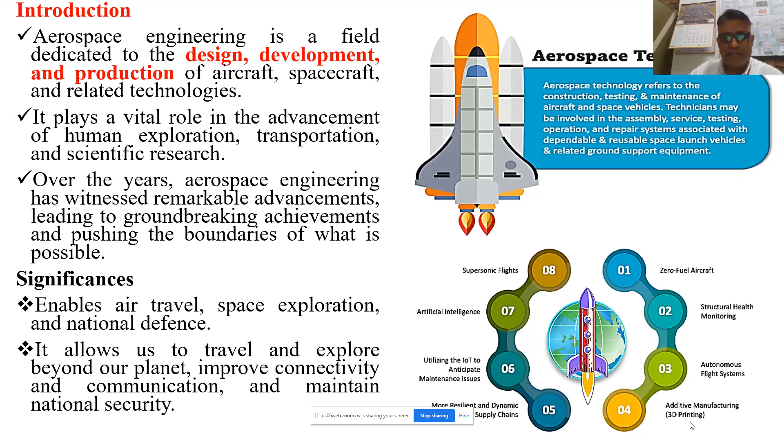Looking at this, one more important thing is electric propulsion. Electric propulsion systems are considered to be the most promising alternative to traditional jet engines. Electric aircraft engines are considered to be very quiet, they produce fewer emissions, and have the potential to reduce operational costs.

Advances in battery technology are making electric aircraft more practical for short range flights and smaller aircraft. That technology basically uses electric power to accelerate charged particles and generate heavy thrust, that's what we consider.

Under the categories, there are a number of categories we consider: resistojets, arc jets, then electrostatics - we have GIE, HET, FEEP, then electromagnetic - pulse plasma thrusters (PPTs) and magnetoplasma dynamic thrusters. This is considered to be one area where things are moving really fast. Depending on the process of how to accelerate the propellant, these electric propulsion thrusters are categorized by electric energy use.

And when you talk about EP, you could see it applied everywhere, from micro to mini satellites. We talk about propulsion power and reliability. Then if I talk about high power EP systems, even space missions, and there are a few challenges.

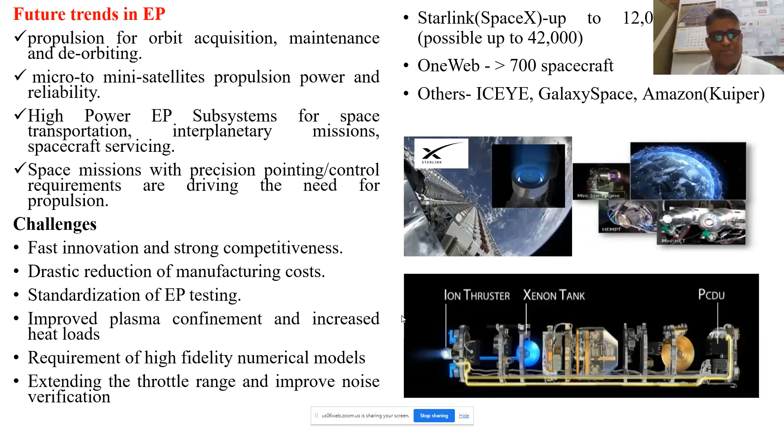Excellent. Then one will talk about what is considered reusable rockets. These are the spacecrafts that can be recovered and reused after the launch. This is one important thing we normally faltered on before, that we were never reusing those rockets which once go into space. So the concept of reusable rockets has revolutionized the aerospace industry in a lot of ways. The one basic aspect is cost reduction. Significantly, if we're utilizing reusable rockets, the cost of our space missions is reduced to a greater extent. It's not required to manufacture new rockets after every launch.

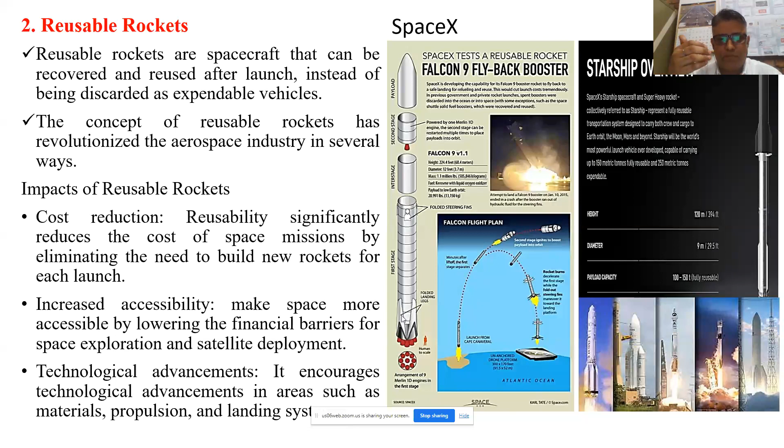And then accessibility increases. You could find more space accessible, lowering the financial barriers for space exploration and satellite deployment. Technical advancements are many more when we talk about materials and propulsion.

So, additive manufacturing, I've already discussed with you how exactly it works. You create 3D objects by adding material layers. So in manufacturing terms, we can prepare complex geometry production, creating intricate and complex geometries. Why we talk about additive manufacturing is because there's a part of weight reduction also, creating complex lattice structures and hollow parts by reducing weight while maintaining structural integrity.

That's what we consider when shifting towards lighter alloys and lighter metals, so that cost also goes down and prototyping can be done efficiently. Cost reduction comes from direct production of the parts without the need of extensive tooling or assembly. Components which can be produced through additive manufacturing include engine components, fuel nozzles, blades and combustion chambers, structural components like brackets, supports, panels, and spacecraft parts such as antennas, mounts, sensors, housing and brackets. Everything could be manufactured through additive manufacturing.

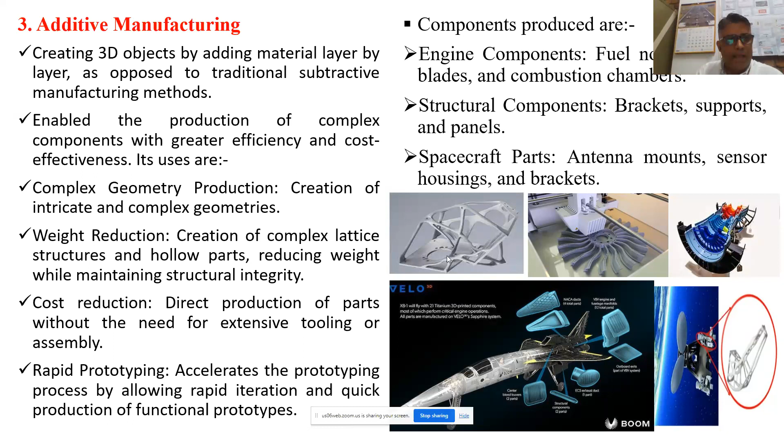So, this is one important area we discuss. Then what we consider is hypersonic flight. Everybody is now aware of this and wants to know more about it. Hypersonic and supersonic travel are opening up new possibilities for high-speed travel and space exploration. Hypersonic vehicles can travel at speeds exceeding 5 times the speed of sound, making them ideal for military and scientific applications. Supersonic commercial aircraft could significantly reduce travel time for long haul flights and open up new markets for air travel. This is one area where things are moving very fast, with huge significance and applications to a greater extent.

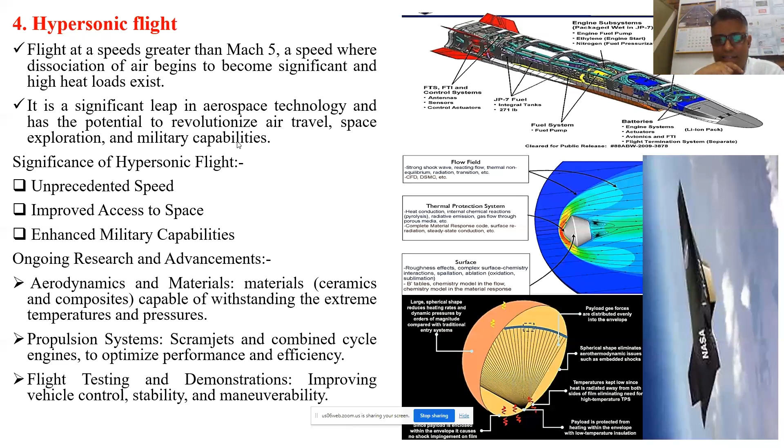Next slide. Then we talk about autonomous systems. But before that, one thing I'd like to mention is structural health monitoring, which is also a system that reports the health of the aircraft. Back in 2007, NASA created it, and that technology evaluates the power systems, fuel systems, communication systems, landing gears, and almost every system of the airplane. That is also one area where advancements are really progressing. That's what we call SHM, structural health monitoring of the aircraft.

Then coming back to autonomous systems, which enable the development of self-operating and self-controlling systems. They are equipped with sensors, AI and decision-making algorithms, sensor technologies, and embedded artificial intelligence and machine learning. Innovations in the aerospace industry are shaping the future of air travel and space exploration, and I talked about this urban air mobility as well.

So urban air mobility is one new area of focus in aerospace that aims to provide new forms of transportation for urban areas. UAM involves the use of small eVTOL, that is electric vertical takeoff and landing aircraft, to transport passengers and cargo in urban areas. So that is one innovation that I really believe will be the future of aerospace.

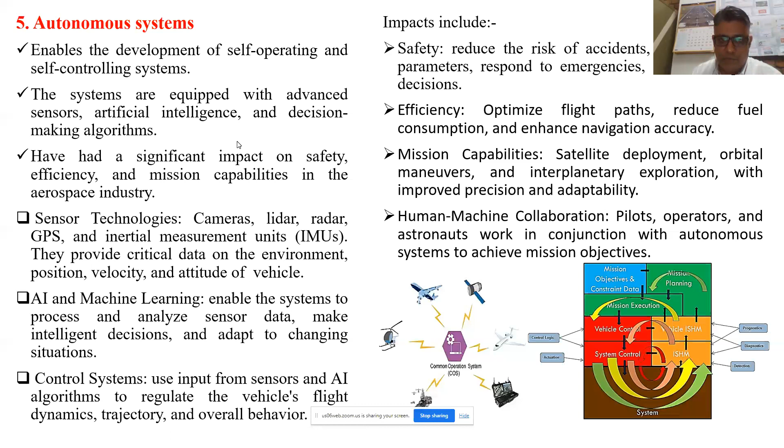And then what we consider next is space tourism. This is considered to be emerging as a new market for the aerospace industry.

So you have heard about SpaceX, right? Private companies like SpaceX, Blue Origin, and Virgin Galactic are developing space tourism programs that will allow civilians to travel to space for the very first time. These programs will offer suborbital flights, allowing passengers to experience weightlessness and see the Earth from a new perspective. There is all kinds of design and development of spacecraft for space tourism going into account. So in some way, we are getting closer to this aerospace sector, and it's becoming more and more fascinating.

And then one more very important thing is HALE vehicles, which are considered to be High Altitude, Long Endurance vehicles, HALE. These are unmanned aircraft that can operate at high altitudes for extended periods of time. These vehicles are used for scientific research, surveillance, and communication purposes. HALE vehicles have the potential to transform how we gather information about our planet, and provide new solutions for communications or disaster purposes.

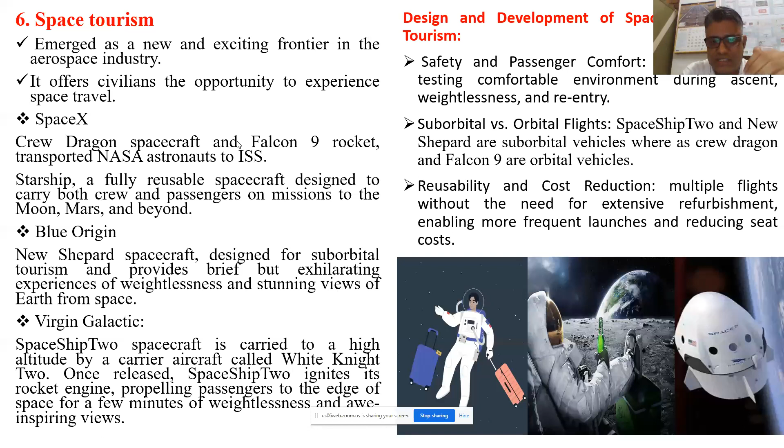One major concern is the environmental concern. The aerospace industry is a significant contributor to greenhouse gas emissions, which is a major contributor to climate change. As a result, there is growing pressure to reduce emissions and improve sustainability in the industry. Aerospace companies are investing in new technologies such as electric propulsion and sustainable fuels as a substitute for traditional fuel to address this challenge.

Then safety is one important concern. The safety of passengers and crew is considered to be the top priority in the aerospace industry. The increasing complexity of aircraft systems and the growing demand for air travel create new challenges for safety. To address that, AI and machine learning based predictive maintenance and improved pilot training will provide safety features as well.

Then we talk about competition and market trends. The aerospace industry is becoming highly competitive nowadays, with a lot of companies flourishing and gaining market share. New entrants like SpaceX and Blue Origin are disrupting the industry with innovative technologies and business models. So in order to remain competitive, established aerospace companies must continue to invest in innovation and adapt to changes in the market. Some government policies also have to be framed and taken into account.

And when we talk about young budding engineers who take up aerospace engineering as their core course, the opportunities are huge. The growth and expansion of aerospace industries have significant potential, with new markets emerging in areas like UAM, space tourism, and unmanned aerial vehicles. As these markets continue to develop, there will be new opportunities for companies to expand their operations and reach new customers.

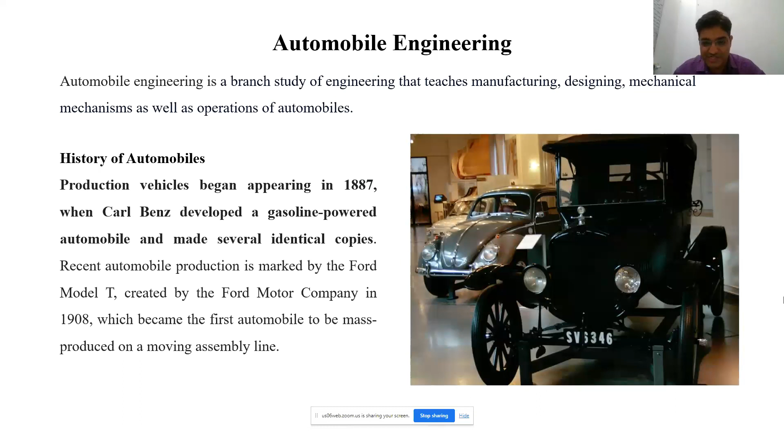You can see the type of automobiles from that era. You might have seen these in some historical movies. These were the first automobiles which generally ran on the roads earlier.

Then, going by the eras, in the 17th and 18th centuries, it was China that, way back in 1672, started an automobile which was steam powered. It was easy to run an automobile with the help of steam because there were already steam engines running at that time.

So it was a steam powered engine, but it could not carry a driver. It was just a prototype, a model actually which they created in the 17th and 18th century by the Chinese people. Then in the 19th century there were some engines which started using steam for movement from one place to another with the help of a driver. So these were the wagon wheels which started in the 19th century. You can see how much time it took from a steam powered engine without a driver to one with a driver. It took almost a century.

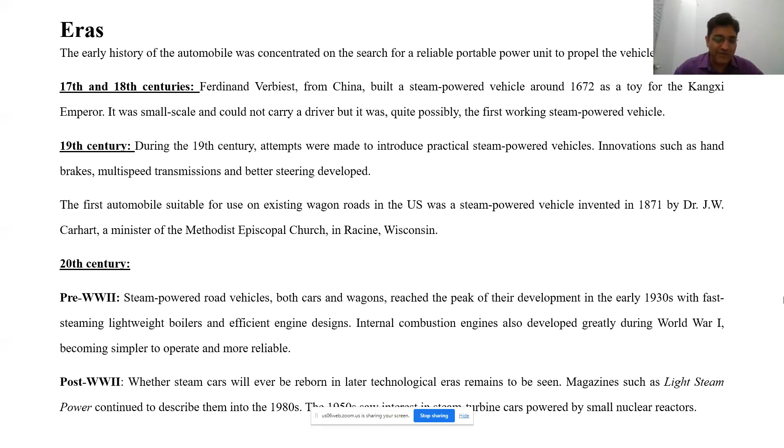Then in the 20th century, before World War II, there were so many evolutions going on in this sector, because for the war purpose, there were so many equipments and things which needed to be transported from one point to another. So at that era, internal combustion engines started. They came into the picture, which we are running now also. So it was in the 20th century when IC engines started.

Then going by the advancements, there are so many things, like airbags, but these are technologies which are obsolete nowadays. So the first advanced technology was in the form of the electric vehicle, we can say. It started in 1890.

Generally EVs, if we read the news nowadays, we find so many articles on EVs, but many of us don't know that it started way back in the 1890s. So this was the first electric vehicle, you can see it in the picture, how it looks like. But the thing is, the battery range was very less, the speed was very less, and it was very high on the cost side. That's why the electric vehicle technology was not used much at that time.

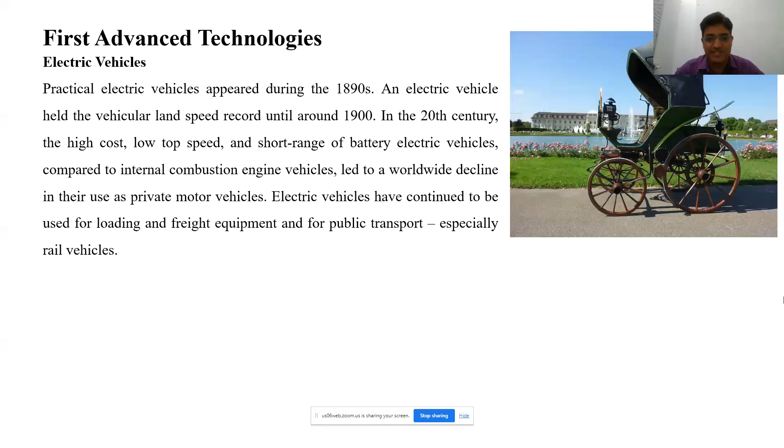Then coming towards the first turn signals, whenever we want to turn on a road, we have to signal it. So it started way back in 1909, and it was mass produced, or came into the picture nicely, in the 1930s. So the advancements took more than 30 years to get the first turn signals. So this was the turn signals.

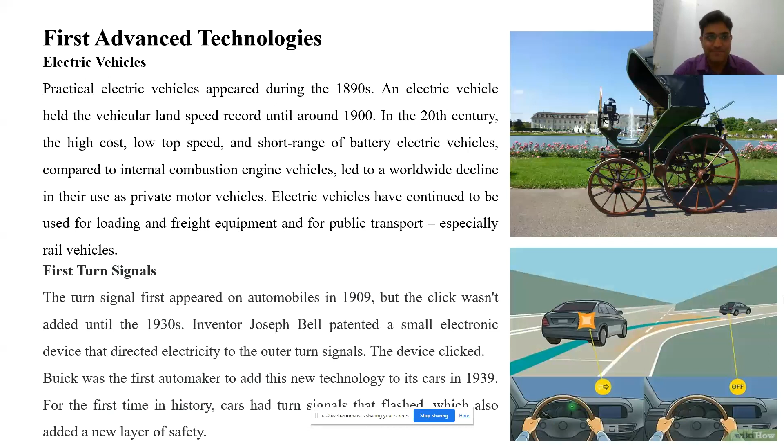Generally you call these indicators. Then some advanced features which you might not know, because these are not there in normal automobiles. One of the most important ones is the blind spot information system. What does it mean? There are three mirrors where you can see what is coming from behind, but there are some blind spots which you cannot see in the side view mirrors.

Then the second one is the reverse assistant. What does this reverse assistant mean? Suppose you are in some hilly area and you have driven, let's say 500 meters or 100 meters, and there are so many turns in that, but suppose you want to get back and there is no way you can turn your vehicle.

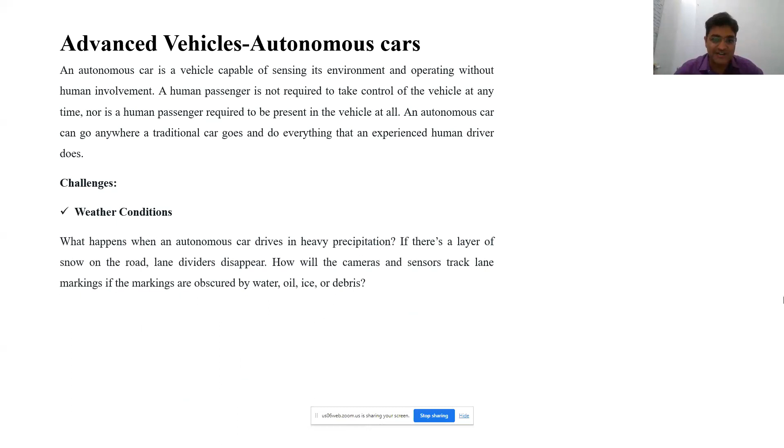Weather conditions. Suppose the road is totally icy, then what will happen to the autonomous cars? It needs to control the speed accordingly, but this is one of the major challenges, the weather condition. What happens when an autonomous car drives in heavy precipitation, or there's a snow layer, or suppose some oil gets spilled on the road? This is one of the major challenges.

The second challenge is accident liability, very much important. Now, who is liable for accidents? Let's suppose there's an accident involving an autonomous car somewhere. So who will be liable - the manufacturer or the human passenger? And why the human passenger? He's not doing anything, he's just sitting over there. So accident liability is one of the major factors why it is not being used publicly.

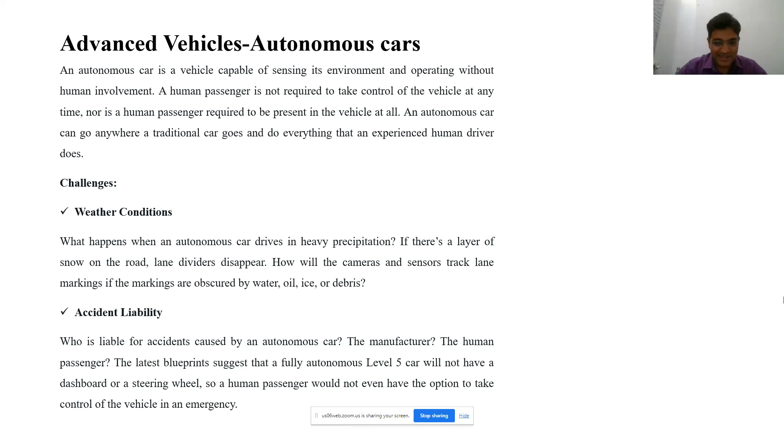Now let's move on to artificial versus emotional intelligence. Here in India, human drivers rely more on non-verbal communication. Generally they make eye contact to signal that you can go at that point, or you can stop, and things like that. This cannot be done by autonomous cars. So artificial versus emotional intelligence is one of the major factors as far as our country is concerned. Will they have the same life-saving instinct as human drivers? Will autonomous cars be able to replicate that connection? It's one of the major challenges.

Now the benefits, there are so many. Reduce traffic congestion - 30% fewer vehicles on the road. Cut transportation cost by 40%. Improve walkability, free up parking lots, reduce urban CO2 emissions by 80% worldwide. But this will only be possible when everything is autonomous. That 80% figure would be achieved only when everything is in an automated way.

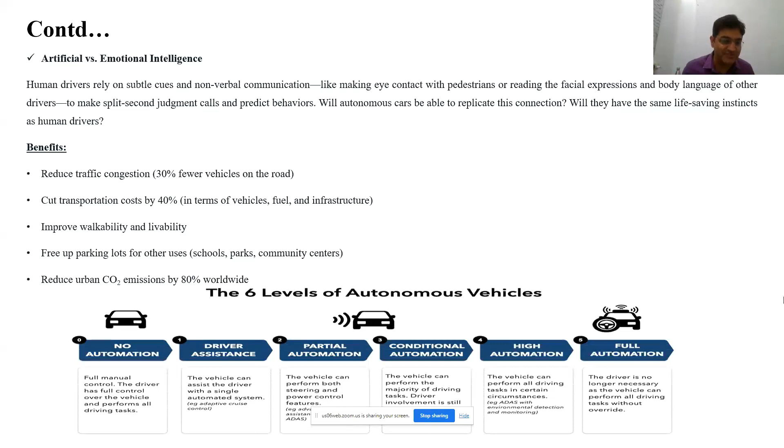So these are the 6 levels of autonomous vehicles. The first one is no automation, meaning full manual control, the vehicles which we are driving actually. The second one is driver assistance - the vehicle can assist a driver with a single automated system, like cruise control. Rest everything is in the hands of the driver. We are generally using this nowadays.

The next one is partial automation. The vehicle can perform both steering and power control, using ADAS - advanced driver assistance system. Partial automation means 50-50%, where 50% is in the hands of the driver and 50% is automated. Then there's conditional automation, where the vehicle can perform the majority of functions - you can say 70-30, where 70% is automated and 30% is in the hands of the driver.

High automation is the next one, in which the vehicle can perform all driving tasks in certain circumstances. This is the major one, this is the good one. Now what is full automation? Full automation means a driver is no longer necessary, as the vehicle can perform all driving tasks without override.

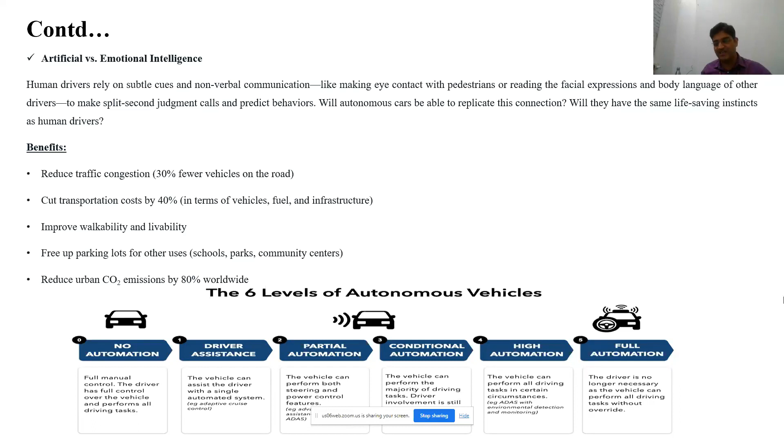In full automation, there is one drawback - you cannot control what the vehicle is doing. In high automation, you can control it. Let's suppose a car is in full automated control, but due to some road conditions, it fails to take the necessary action. You can take action in high automation type, but you cannot do anything in the full automation type. So these are the 6 levels of autonomous vehicles.

Now coming to the next technology, and that is EV - a small concept. I told you it started way back in the 19th century. It started with a small model created by a Hungarian priest in 1828. Then from 1832 to 1839, Robert Anderson invented a crude electric carriage, which could take baggage from one end to another.

In 1835, in Netherlands, an electric car was created powered with a non-chargeable battery, meaning you cannot charge the battery. As soon as the battery gets ended up, your vehicle stops and you cannot charge it again. Then in 1891, they created the first electric automobile in the US. And then in 2008, Tesla was released, you know it.

Now, how does it work? Actually, everything is the same, but it is being replaced. It replaced IC engines. Now why are we replacing IC engines with electric vehicles? The thing is quite simple: fossil fuel scarcity. Fossil fuels are exhausting at a very faster rate. We need to look at other resources which are in plenty but haven't been harnessed yet to full extent. That's why we are moving toward EVs now.

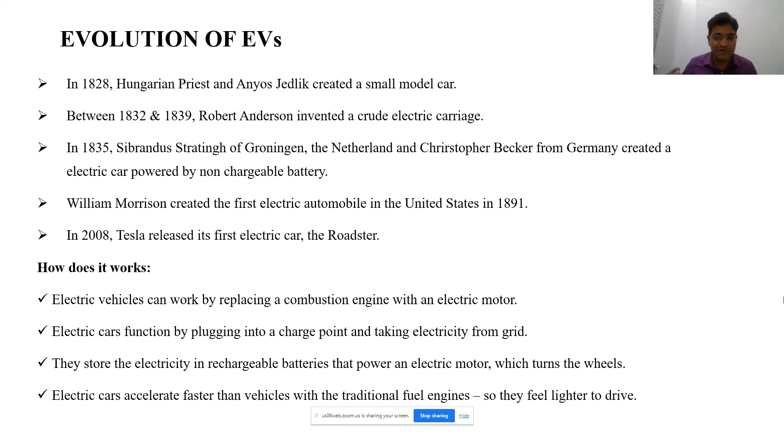Now, the advantage is it's easy to recharge. Even a normal household socket could be used for charging, which I told you earlier. In Canada, it works like that—there are so many charging stations in the home itself.

There is no need to buy gas again. There are no emissions—one of the most important things is there's no emission of harmful gases, so we can say pollution gets reduced. Then, since it works on electricity, maintenance is less, because with IC engines there are so many filters which need to be changed again and again whenever we give our vehicles for servicing.

Now the challenges are: charging points are less, as I told you earlier. Charging time is much longer—even with fast charging, it takes 30 minutes to charge to 80% capacity. So it's not a very high time, but still we consider it a challenge.

EVs are much more expensive—you can see that EV vehicles are very expensive nowadays. We cannot afford it because it is not being produced on a mass scale as of now. The top speed of EVs is also very less compared to conventional vehicles, meaning the IC engine vehicles we generally run. And electricity demand will increase, which will require more power plants to be installed. So these are some of the challenges.

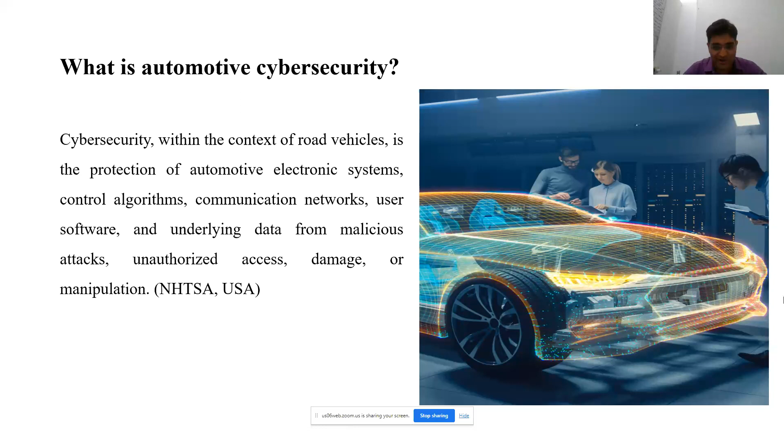It was really a wonderful session, and you threw light on advanced vehicles, emotional intelligence, and electric vehicles as well.